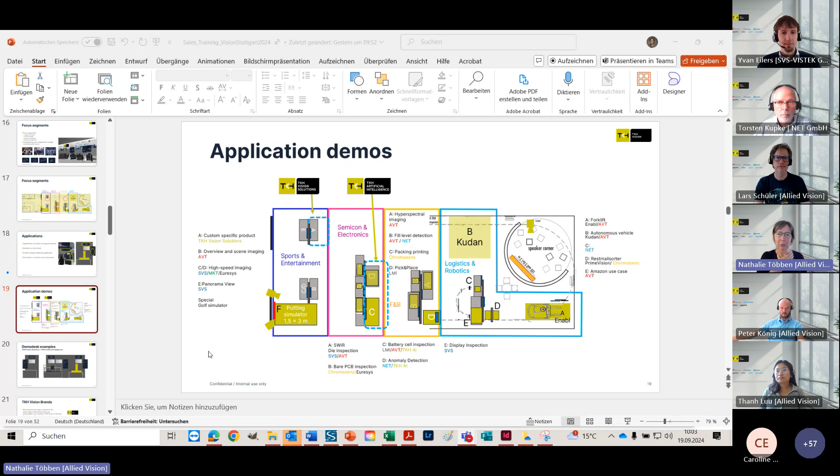So if you have the time to stay in the call, it would be very good that you also learn about this important topic. But we will record the presentation anyway, so we can also share the information with you after the call. And with this, I hand over to you, Lars.

Thank you very much, Nathalie. Yeah, so since yesterday, all of you are aware that we will have a different setup on the booth, mainly driven by the segment view. So the 4 segments we already talked about.

And this is reflecting our strategy. So at least at Allied Vision, we follow this kind of focus segment approach for roughly 3 years. And it's really the leverage to focus us to a certain demand, certain requirements in certain industries, segments, focus segments.

What I want to pinpoint to is, of course, we are not neglecting the huge market of factory automation. So this is still the story for us as a business, and not for the Vision Show at all. But we use the demos we show on the booth really to have eye catchers, to have talking points with customers coming to the booth.

So please, all of you who is participating in the show on the booth, please make yourself familiar with the demos so that you can, as we say, fill the first 5 minutes, and get the booth visitor involved into his problems, his questions, and of course, in the end, we want leads and deals.

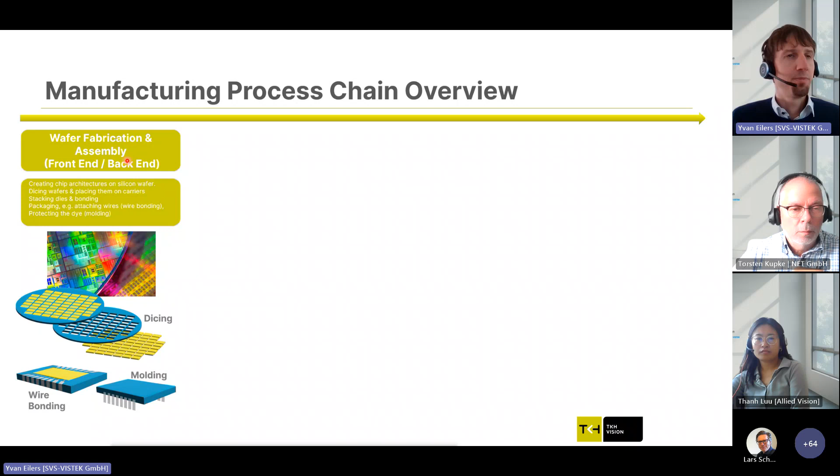The general idea of this segment area is to give a manufacturing process chain overview and to show that we have great product fit for inspection tasks throughout this manufacturing process. If you want to create an electrical product like a smartphone, a laptop, or even an electric vehicle, you need multiple different parts, and very often you also need a lot of electronics. In this electronics field, you start with the wafer fabrication and assembly step, classified into front end and back end application, including steps like wafer production and dicing of the wafer to get dies, wire bonding them, molding them, and in the end getting packaged ICs.

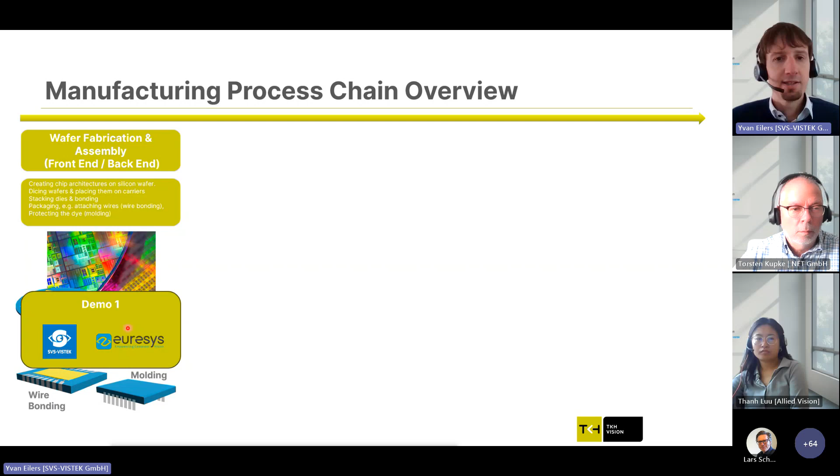This is where our very first demo is going to be situated. This is going to be a demo done by SVS-Vistek, which also uses Euresys products, and it's going to be a die inspection using SWIR cameras demo.

Once you have your packaged ICs, typically you go to the next step of PCB board creation, where you start with bare PCB boards on which the packaged ICs need to be placed and soldered. Here our second demo takes place, which is going to be a Chromasens demo, the bare PCB board inspection demo.

Nowadays it's also quite important to have batteries, for example for one of the very big growth markets in our industry today, electric vehicles. This plays a crucial part, but also in other components. Here our third demo is going to take place, demo 3 from LMI, which also uses Allied Vision products. This is going to be a prismatic battery cell inspection demo.

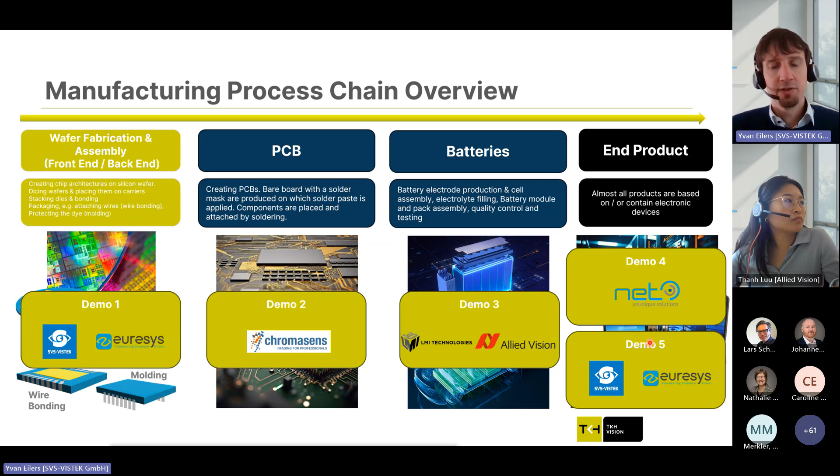Finally you reach end products, which could be a lot of different things, from PCs to laptops, displays, cars. Here we are going to see 2 demos. On the one hand, a demo from NET, which is going to be anomaly detection in USB sticks as one of the final products. The last demo, demo 5, is a high resolution display inspection demo done by SVS-Vistek, also using Euresys products.

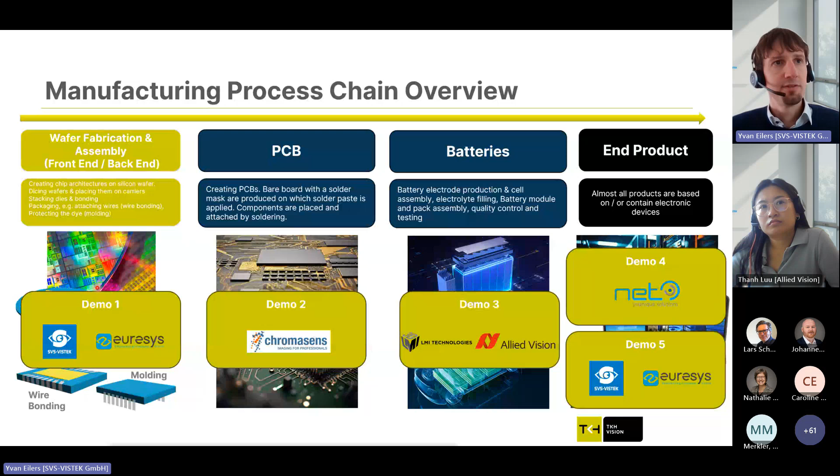So this is basically the manufacturing chain process overview with a logic following through the demos. Now I would like to jump into each of these respective demos to give you more details about them.

The first demo, as mentioned, is the die inspection using SWIR cameras. Whenever you have dies and you want to use them in your electric components, you have to make sure they are okay and don't have faults, meaning no faults on the surface, but also no faults inside the dies themselves. Typically these dies are created out of silicon as material, and here our SWIR cameras come in very handy, because silicon is transparent for SWIR wavelengths.

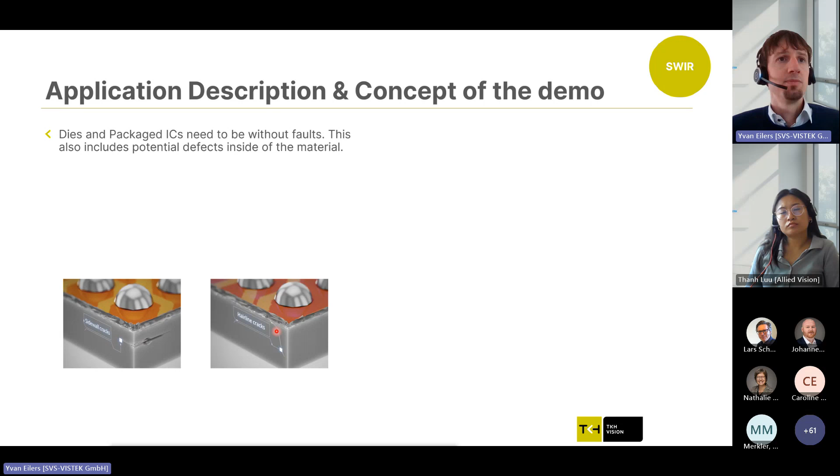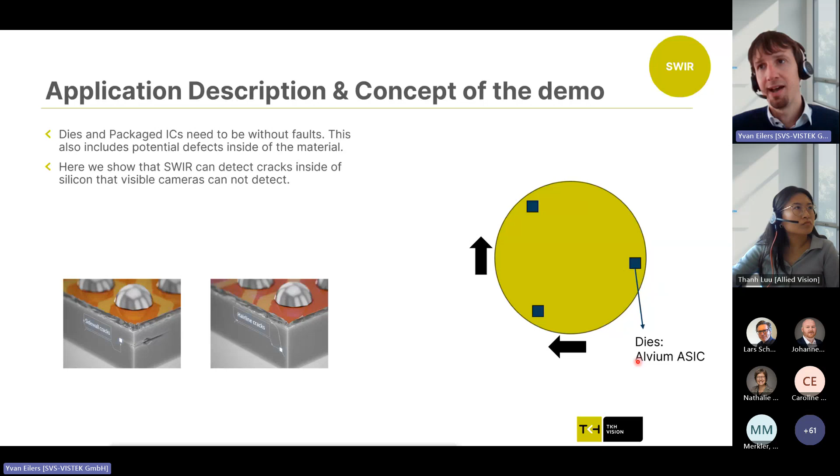Typical applications that you see in the industry are, for example, inspections for sidewall cracks or hairline cracks. We built a demo that, while not exactly the same, uses that idea, with a turntable where the dies we use are actually products we use ourselves - dies that are Alvium ASIC chips. We basically took them out of Alvium cameras, and we are going to inspect them with a new 5 megapixel SWIR camera, the FX0992 MCX-T.

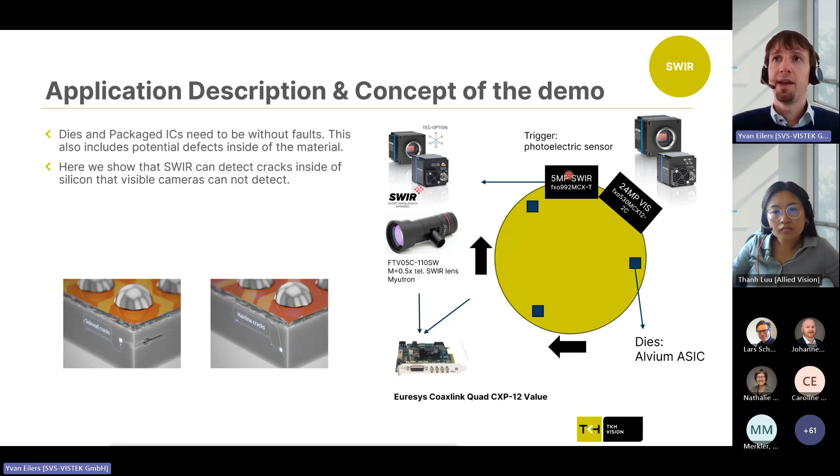This is a CXP12, a 5 megapixel SWIR camera which is TEC cooled, so TEC stabilized. We're going to attach a telecentric lens to it and read it out with a Euresys Coaxlink Quad CXP12 value grabber. Additionally, we have a 24 megapixel fxo530MCX12-2C camera, a 2x CXP12 interface camera that allows high frame rate, high bandwidth, high speed with 24 megapixels. On a monitor we'll compare the images of the 2 cameras so you can see on the SWIR image the cracks inside the dies, which you cannot see in the visible image because SWIR can look through the die.

Additionally, we're going to use Euresys Open eVision, a software suite, to classify these dies into okay or not okay, meaning broken or not broken. This one would be an example of broken, and this one would be an example of an okay die. We'll make it such that even though these 2 cameras are displaced in space, on the monitor the 2 images always appear at the same time. This is something the software team at Euresys is working on.

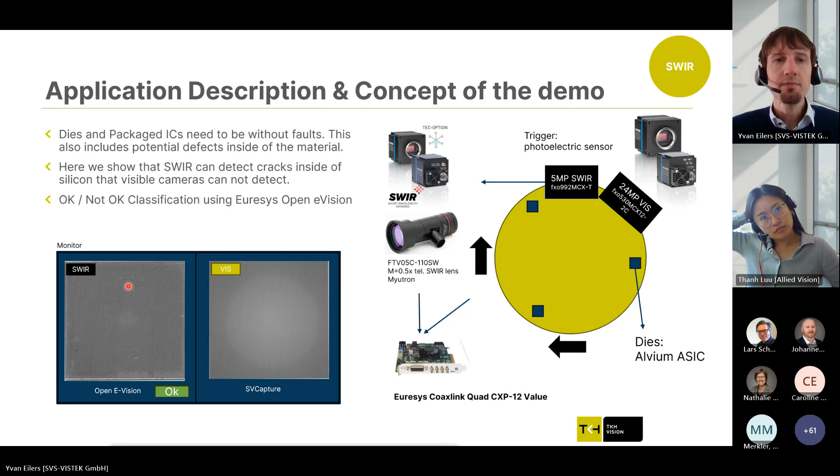What are the system highlights and benefits? I guess one of the biggest benefits for the customer is that he can reliably detect small subsurface defects inside of the silicon, and that is because of our new high-resolution camera. This 5 megapixel is a leap in resolution in the industry, something very positive because of the new Sony sensor that came out.

We also provide high image quality given our optimizations in the camera itself, such as 2-point NUC and defect pixel correction. Our TEC stabilization additionally makes sure we have very reproducible imaging results, and if you use this TEC to cool down the sensor, you get even reduced noise as a benefit. As Jens mentioned yesterday, we have a very broad area scan portfolio with different interfaces, resolutions, and camera sizes, so the probability is very high that we find a perfect fit to solve the customer's problem if he needs SWIR.

Additionally, we use the Coaxlink Quad CXP12 value grabber. That is a performance-optimized frame grabber that allows high frame rates, high stability, and low latency data transfer, which is basically all very important in this die inspection world, where customers typically need 30,000 to 40,000 inspections per hour. So a system that can go fast, that is stable, and that has low latency is of added value.

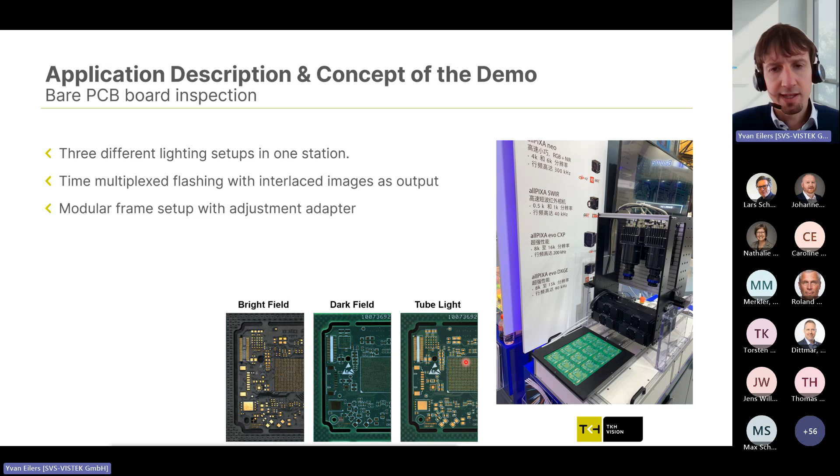The modular frame setup comes with adjustment adapters so that you can easily adapt it to your customer's application needs. This allows fast and optimized module creation. And as Robin mentioned yesterday, aligning the line scan cameras is far from trivial, so this adapter adds value and saves time for the customer.

So this system can be used for different inspection tasks in the bare PCB creation process. It can be used to inspect the screen printing, and actually also the photolithography, where one defines the circuit patterns and where electrical components should be placed. It can be used to inspect the subsequent chemical treatment etching, where these underlying copper structures are exposed, and to also inspect the mechanical processing, meaning, for example, the cutouts of the boards, if they are all at the right position. And it can also be used for classical AOI, automated optical inspection, where one basically looks for defects like stains, scratches, protrusions, if the pinholes are at the correct position, if there are shorts between the circuits, or even if there are open circuits on the board itself.

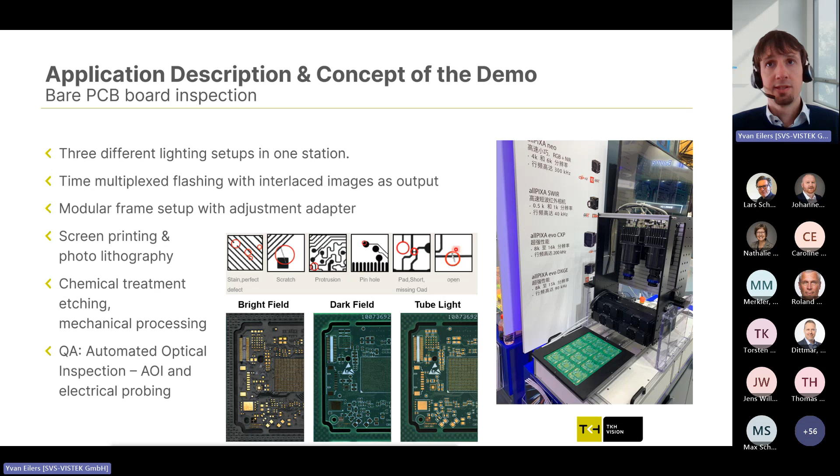System highlights and benefits are, on the one hand, the allPIXA camera itself. This is the allPIXA evo 16K with a CXP interface that allows 73 kilohertz in color output, but it can also be used in a mono version where it allows 200 kilohertz line rate. Additionally, the shifted mono lines allow high-resolution imaging. This is what we learned yesterday from Robin. He showed more detail in his presentation, so if you are interested in that, you can look at that again.

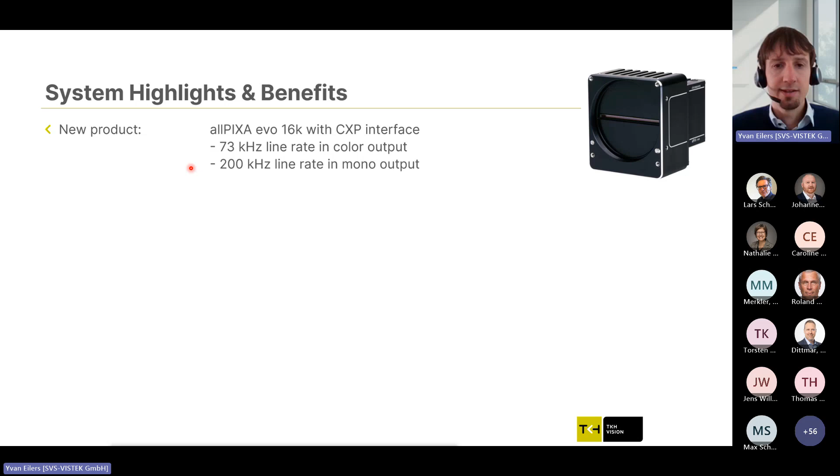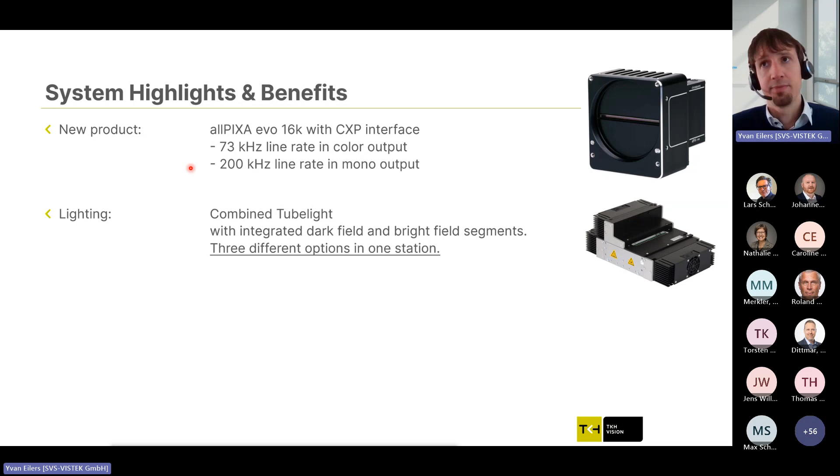The lighting is an essential and very cool part of the demo that allows 3 different lighting modalities in one compact module, with precise triggering functionality, so that this shown time multiplexing of the different illumination can be used, and they can also be used at high speed. So this is also a big USP here.

Then I already mentioned the Chromasens line scan vision platform that allows custom housing. As shown by Robin, it is a modular concept for an optimized and easy to integrate system, and it allows precise alignment of, especially, the difficult to align line scan cameras. At the end, such an inspection system has the benefit to improve the yield in costly electronic manufacturing steps and makes sometimes still present manual inspection tasks redundant.

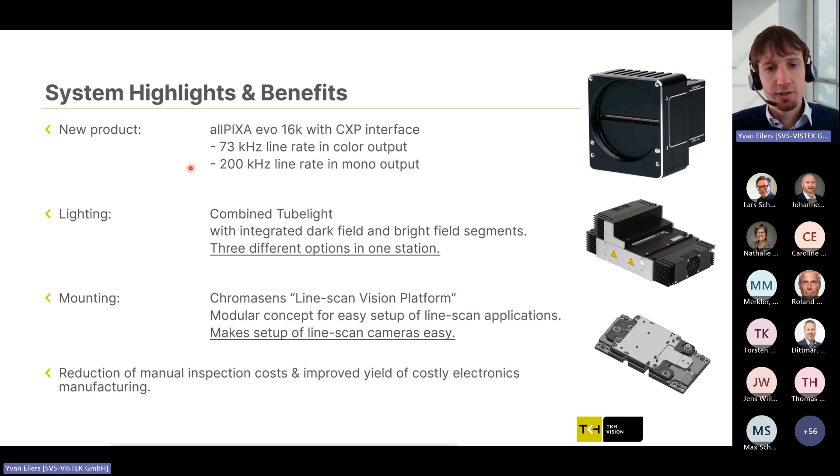So on the show, you can ask Martin Merkler, who is a product manager for Lighting, for deeper knowledge. Maximilian Klammer, who is the head of R&D, is going to be present, as well as Robin Zöckler, the project manager for cameras, who also made a presentation yesterday.

The next demo is going to be the prismatic battery cell inspection done by LMI, which also uses Allied Vision cameras and which uses the power of the TKH AI group. Christian Benderowitz already touched on this demo yesterday. This demo showcases a wide range of machine vision technologies, including 2D, but also 3D laser triangulation, and 3D confocal technologies for 100% inline quality control. In this case, it's going to be used for a prismatic battery cell inspection.

It uses different Gocator sensors and the Allied Vision camera, and the employed LMI GoPxL software, which basically runs this whole system in the background, links the different TKH vision technologies - here the different Gocators, but also the Allied Vision cameras. And the software is going to apply rule-based, but also AI algorithms to perform 2D and 3D image analysis.

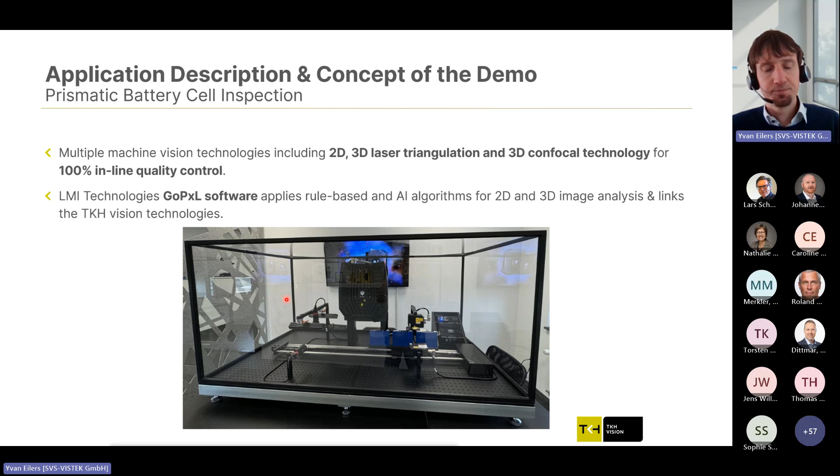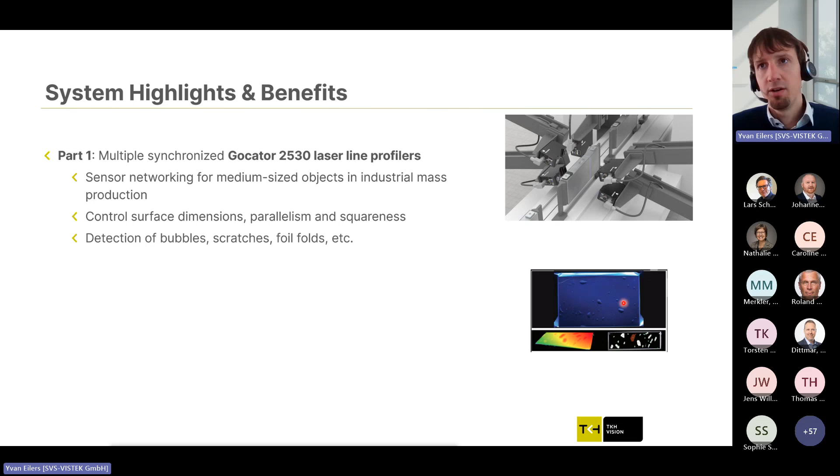So the demo is built up in 3 parts. The first part uses multiple synchronized Gocator 2530 laser line profilers. This is a powerful example of sensor networking for medium-sized objects, the prismatic battery cells, in an industrial mass production application. Here it is used to control the surface dimensions and the parallelism and the squareness of the battery pack, but it can also detect bubbles inside of the pouch or scratches on the foil.

The second part uses the Gocator 5516 line confocal imaging sensor to detect scratches and sub-micron defects on this shiny top part of the battery. This is ideal for metrology applications where the customer requires very high resolution and high speed. This system allows resolutions up to 2.5 micrometers in X, which I think is pretty cool, and the repeatability of up to 50 nanometers, which I think is also quite amazing.

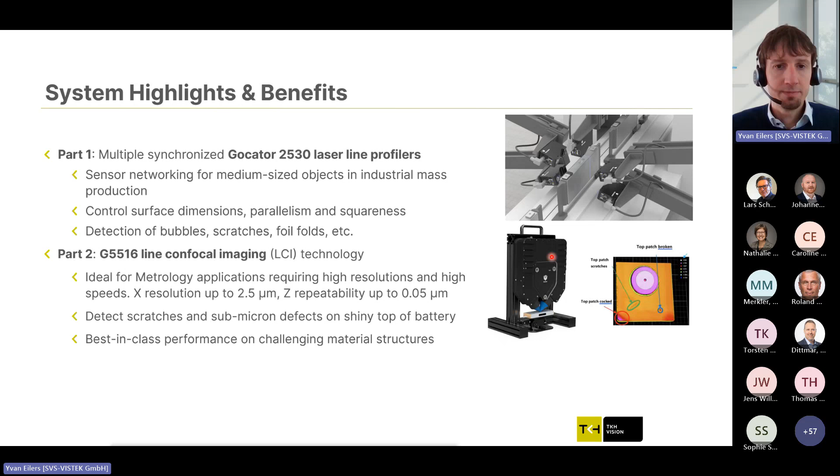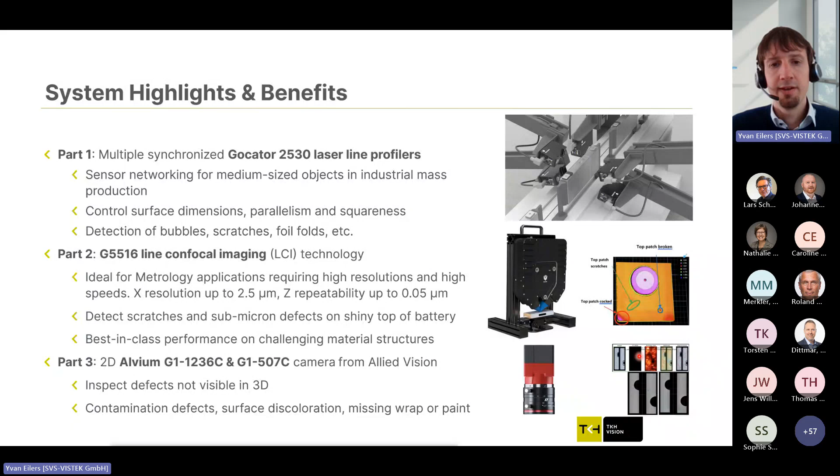So this system shows best-in-class performance on challenging material structures, such as multi-layered, curved edge, transparent and shiny materials, which Christian Benderowitz showed yesterday in his presentation, if you want to look at that again. Finally, the third part uses 2 cameras from AVT, the Alvium G1-1236C, as well as the G1-507C, to inspect defects that cannot be seen with the 3D sensors. These include contamination defects or surface discoloration, and also missing wrap or paint.

And as I mentioned, another important part is the GoPxL software, which is a new important product of LMI in this trade show.

This GoPxL software is to link all TKH vision products, meaning it can be used at the same time with Allied Vision cameras, ChromaSense cameras, or LMI technology, but it is also to include the other OpCos in the future.

With that, you can use the advantages of 3D, but also 2D imaging, in one application with one single software, which is a big USP for the customer.

And this GoPxL software comes with onboard tools like rule-based algorithms, but it also comes with AI optimized by TKH AI.

The GoPxL software also comes with the GoHMI Designer, a new application for easily building a custom user interface that shares the hardware acquiring data, for example the scan data, and outputs it to the end user of the customer, visualizing the scan data.

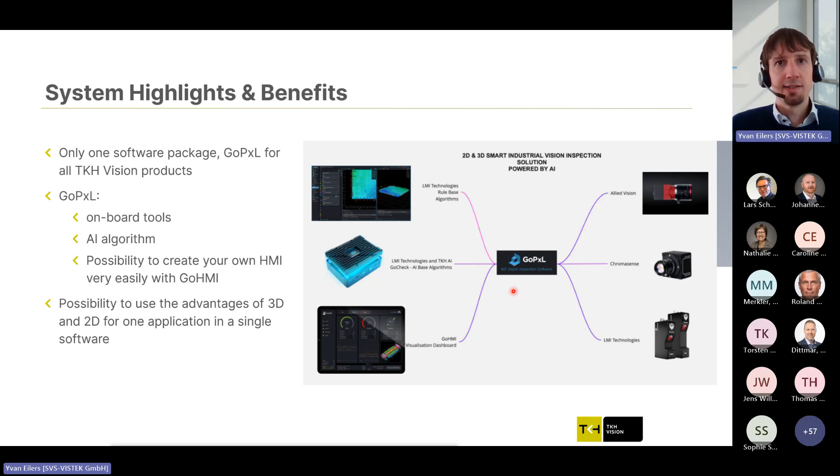The next demo, demo 4, is going to be anomaly detection in USB sticks, a demo created by NET, which also leverages the power of TKH AI.

As in many industries, also in the electronics industry in general, very often, normally always, various components are assembled to form a final product. For example, PCBs are assembled with connectors and a housing to form a USB stick.

During the steps in the production process, problems can arise, such as incorrect or missing components, which are sometimes only discovered later, and in a worst case, only in the final inspection. This would be quite bad, because then you have to throw away the whole complete final product instead of only partial components. The problem is that not all possible errors can be defined in advance.

And they cannot always be seen with a rule-based system. Especially in the case of previously unknown defects, large quantities of unusable end products can potentially be created.

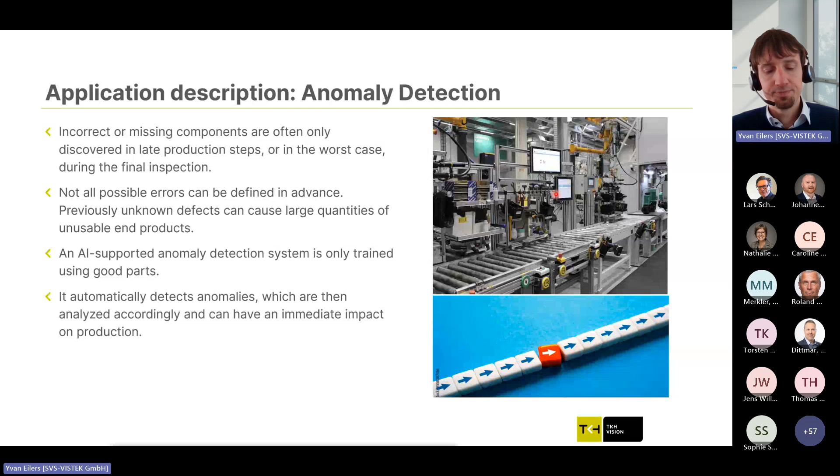Here, NET is going to show an application where the NetIM camera is trained with reference images as shown here. Then all kinds of different PCB boards with connectors are going to be placed on a toy train that is going to run in a circle.

The NetIM camera is going to look at these samples, automatically inspect them, and show the results on a screen. Here you are going to automatically see the detected anomalies. For example, here there's going to be a chip, a Halo IC, that is missing, and here there is actually a whole connector that is not attached, that is missing.

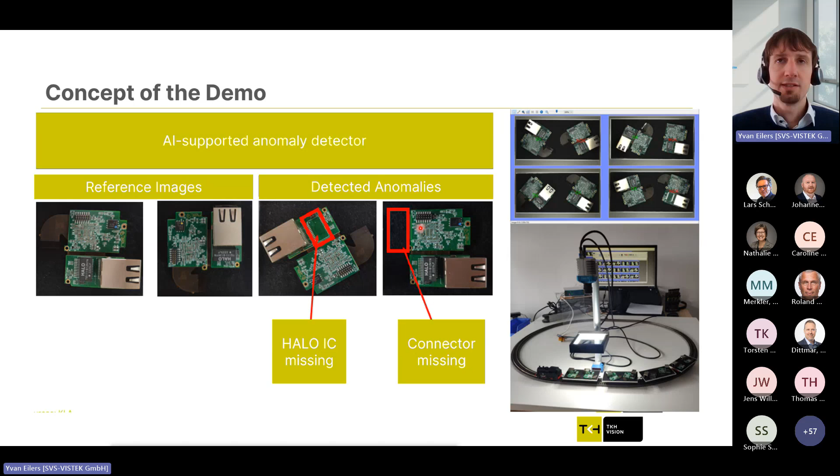The camera used is the IR2305C model, which uses a 3-megapixel IMX252 sensor and allows 65 frames per second. But the IM camera, as we learned yesterday, can in general be equipped with different sensors and adapted to the customer need quite flexibly.

Communication with the end user is through a 1G interface, and the AI model image processing is done efficiently in the camera itself, which is a big USP here.

The application software also includes training applications and training data management tools to make it quite easy and comfortable for the customer. A system highlight is that the AI-based anomaly detection is flexible and can be specifically adapted to different requirements of, generally speaking, industrial automation and/or quality assurance applications.

And the employed deep learning algorithms in particular are able to detect very subtle differences and anomalies in image data that are typically difficult to detect even for humans, but certainly also for traditionally rule-based systems.

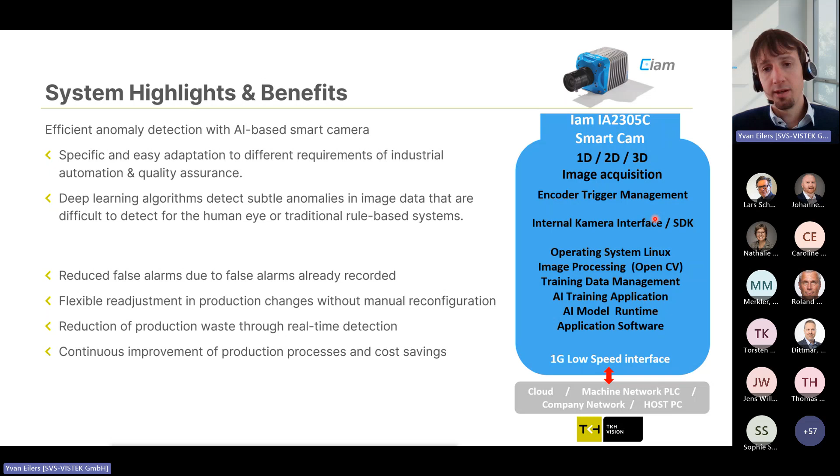Further benefits are that it is a self-optimizing system, meaning false alarms already recorded don't lead to false alarms again. It can be flexibly readjusted if there are changes in production without time-consuming manual error definitions, as often needed for rule-based systems. In the end, it allows reducing production waste through real-time decisions and continuously improves the production process through its functionalities and self-learning abilities.

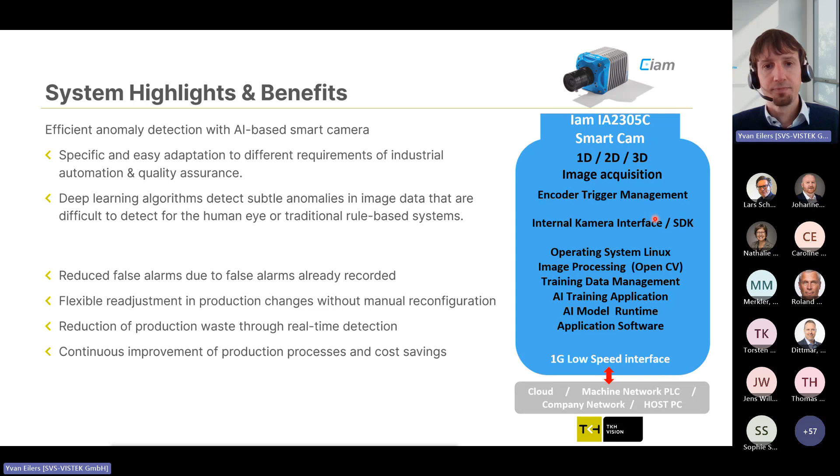So experts at the show are Tim Miller from the product management team, Arno Dieb from the FAE team, Jens Will from the business development team, as well as Thomas Höfner from the sales team.

All right, so then we already reached the last demo, which is going to be demo 5, the high resolution display inspection demo, which is done by SVS-Vistek in combination with Euresys.

As we know, increasing display resolutions is a major trend in our industry, and there are also rising requirements on display quality, also in terms of subpixel quality. Imagine AR, VR sets that you put very close to your eyes - there you really have to make sure all pixels are perfect, because you would see that directly with your eyes.

This calls for precise spatial measurements of luminance and chromaticity, and also highly accurate color measurements. This in turn calls for cameras with maximized resolution, high dynamic range, low image noise, and industrial camera volume manufacturing compatibility. This is exactly what we show in this demo.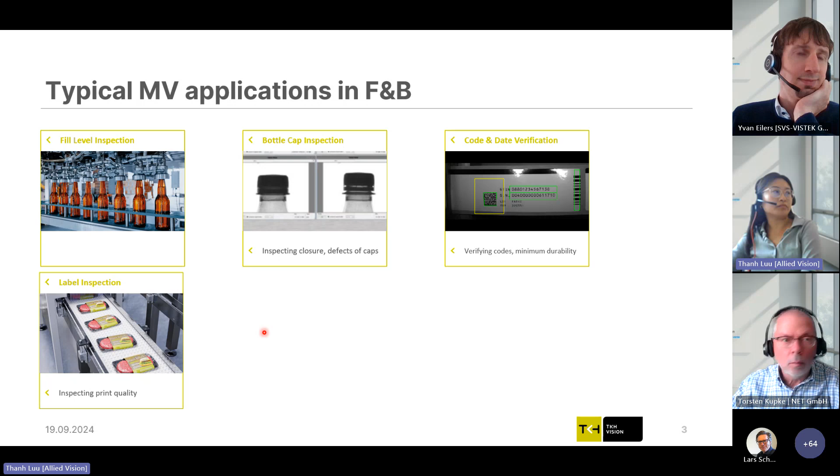Then we have code and date verification when it comes to the minimum durability, for example. And also very classic, I'd say, label inspection, so really looking at the print quality, if everything is all right with that.

Let's jump into the first demo, where we partner up with Clyde HSI. Clyde HSI is a partner from us, located in the UK, and they are specialists in optical spectroscopy, providing a wide range of both hyperspectral and conventional spectroscopy.

Instruments and full systems as well. For this demo, you will see the hyperspectral scanning system, which will be provided by Clyde, and the setup will be supported by Clyde, hopefully.

The system is available with up to 2 cameras, which you can see here on the left and on the right. However, at the Vision Show, it will be only 1 camera, and this camera will be our Goldeye, the AVT Goldeye.

What else can you see? You can see illumination is included, and we have a conveyor belt as well.

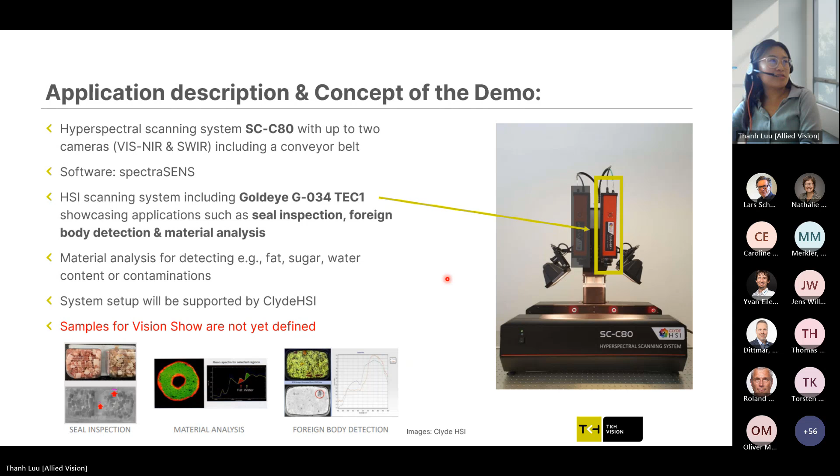Let's come to the system highlights. Well, first of all, the system is very quick and easy to set up. As you can see, it's not super big, so it's easy to set up on standard tables. It can acquire high resolution spectral images in seconds.

It has autofocus, also auto exposure setting. You saw illumination is integrated as well. The software is very intuitive, and it has the optional possibility to have a dual camera acquisition. However, in our case, it will be only 1 camera.

On the right side, you can see how it could look like when inspecting meat and distinguishing the bones from fat and lean meat.

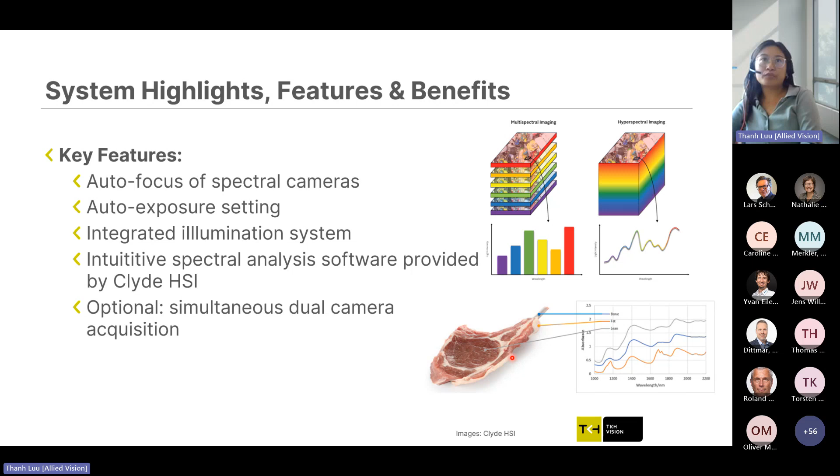Who can you ask for this demo? Well, we have our expert, of course, Jens Hasshagen, who is Business Development Manager for SWIR. Then we have Ralf Hesselberg and Arun, who will hopefully soon also be trained how to use the system.

We assume, not the whole Vision Show, but maybe one or two days, hours, there will also be John Danskin from Clyde, HSI itself. They will also have their own booth at the Vision Show, as far as I know. I'm not assuming that there will be one person from Clyde all the time with us, but I think that's no problem.

Let's move on to the second demo, which will be showcasing the application fill level detection and material definition of liquids. This demo is provided by NET, our OpCo, and the product is the Iam, which is the AI-based smart camera.

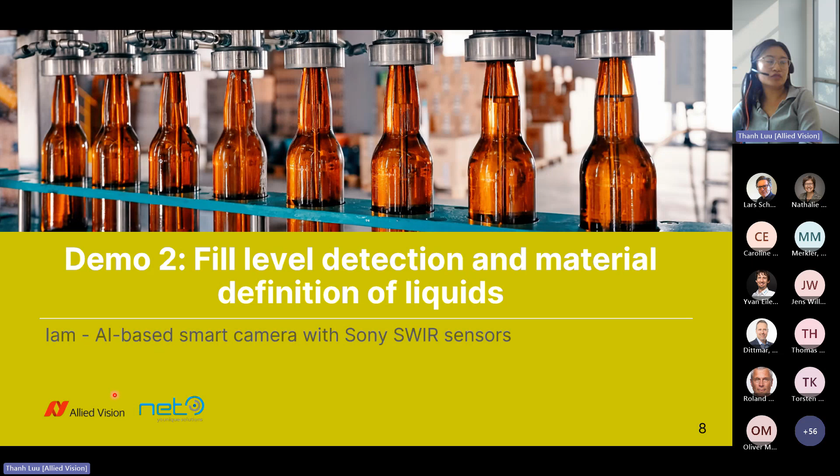Now you have heard it several times already, it has the Sony SWIR sensor. And why is Allied Vision here as well? Well, the camera is also based on the Alvium series from AVT, which is why both OpCos are shown here.

So how will the application work? You will see a turntable with bottles, and on the bottle there is a label which is opaque.

The application works with a wavelength of 1300 nanometers, achieved through mixed lighting and a bandpass filter, and corresponding optics. In this range, the label is opaque to visible light but becomes transparent so that the fill level can be determined precisely.

And then on the monitor, you will see it looking like this. One special aspect to mention is that these bottles will be filled with water and oil, and with this application, the contents can then be distinguished due to the different light transmittance at 1300 nanometers.

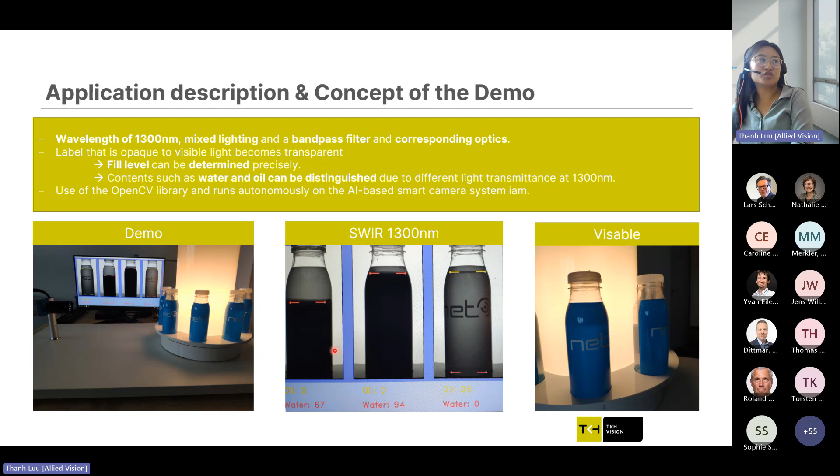That's basically about this application. Maybe one more thing to mention is that the self-developed OpenCV library is being used here, and it's going to run autonomously on the smart cam itself, as Yvan already mentioned for his application.

The system highlights, features, and benefits: we have the camera with Sony IMX sensors with a spectral range of 400 to 1700 nanometers. The Iam is a very cost-effective camera that includes visible and invisible spectrum, but also image processing algorithms.

And it has an open camera concept, so the customer is free in choosing the software.

Who are the experts for the demo at the booth? You have seen them already in the previous presentation from Yvan. We have Tim Miller, product manager, Arno Dietz, FAE, Jens Will from business development, and Matthias Eggenweiler from sales. So if you have any further questions, feel free to approach the NET colleagues here.

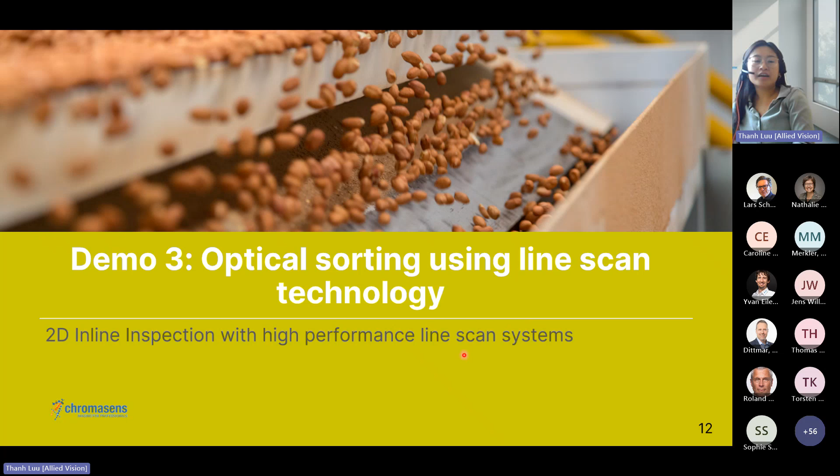For the third demo, we have the application optical sorting, but also print inspection, let's say, using line scan technology provided by Chromasens, of course.

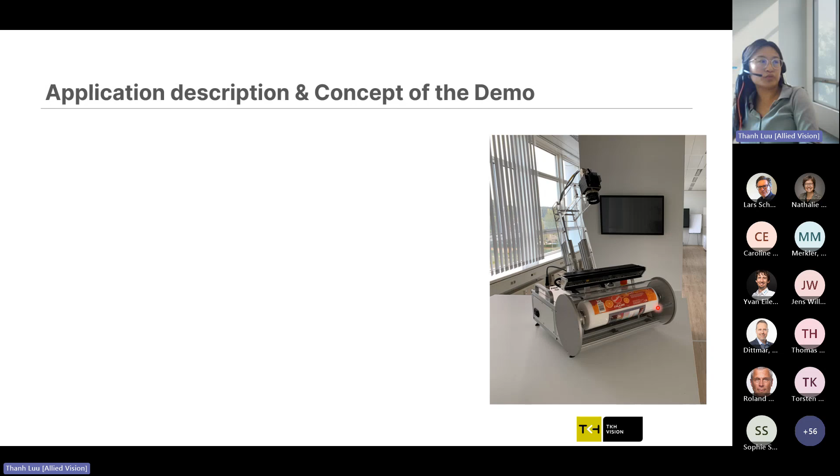What you will see is this roller here, where there's a foil on, or a packaging foil, let's say, from a bottle. And then we have the Corona light from Chromasens and the allPIXA neo 6K camera. On the roller, we don't only have this packaging foil, but also a second sample, which will be lentils, rice, or coffee beans that are glued on the roller.

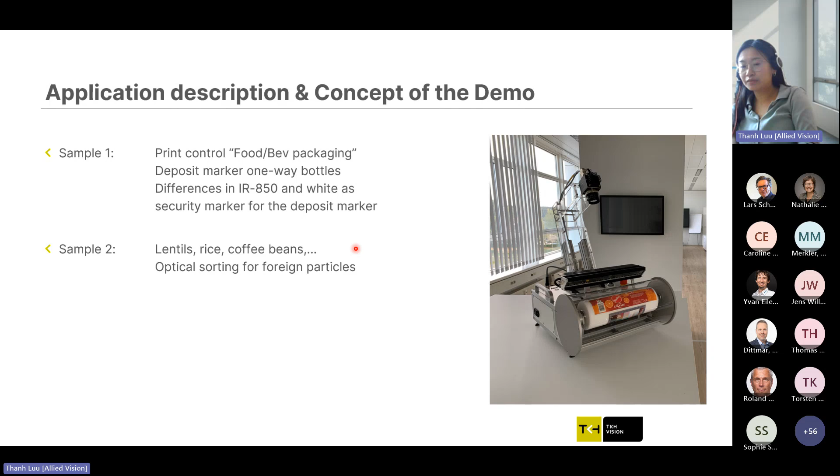What we want to show here is for sample number 1 that the camera is capable, has the special feature not only to provide RGB images, but also near-infrared images. You will see the deposit marker on the left side.

This is the RGB image. On the right side, you have the near-infrared image. At a wavelength of 850, you will see that the middle, or the bottle here, will somehow quite disappear, let's say.

This can be considered a security feature, so it proves the authenticity of the packaging. The fact that the color of the deposit marker behaves differently in the near-infrared spectrum compared to the visible one is the proof, let's say.

For sample 2, we will have these rice corns, lentils, and then there will be false lentils and rice corns, and this will also be detected by the line scan camera from Chromasens.

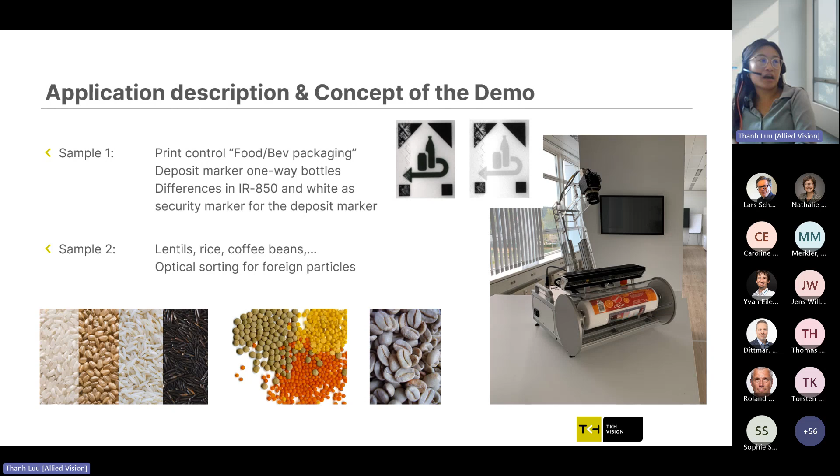Highlights, features and benefits. First of all, again, we have the allPIXA neo 6K with the near-infrared channel, with line rates up to 90 kilohertz color and 270 kilohertz in mono. And it's very compact, so with its small size, it enables simple and scalable integration in small installation spaces.

The camera is available in 10 gig E with a 10 gig E vision interface or CoaXPress. Second, we have the Corona illumination dark field module with white and infrared LEDs mixed.

What is so beneficial about it? Well, it has very high efficiency reflector technology, and it's one of the brightest line lights in the market.

It has a modular concept for different lighting setups, and it has over 560,000 setups that are possible.

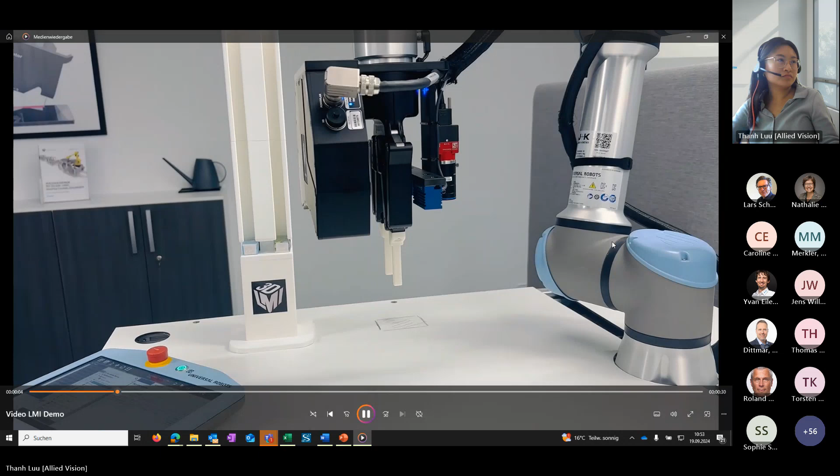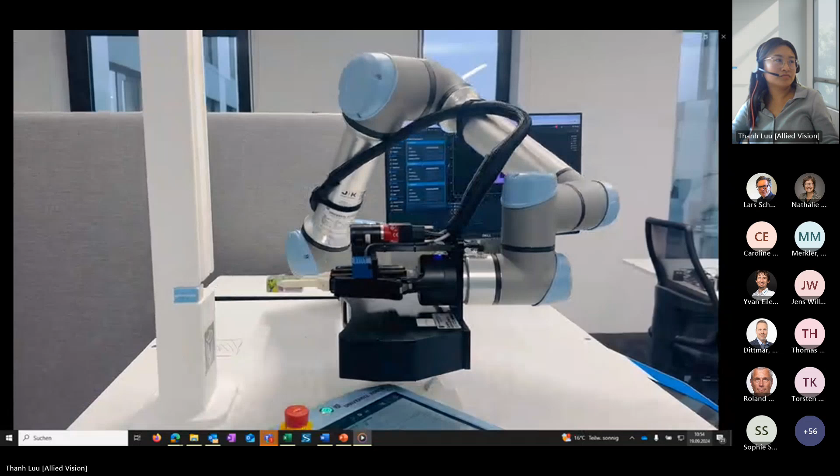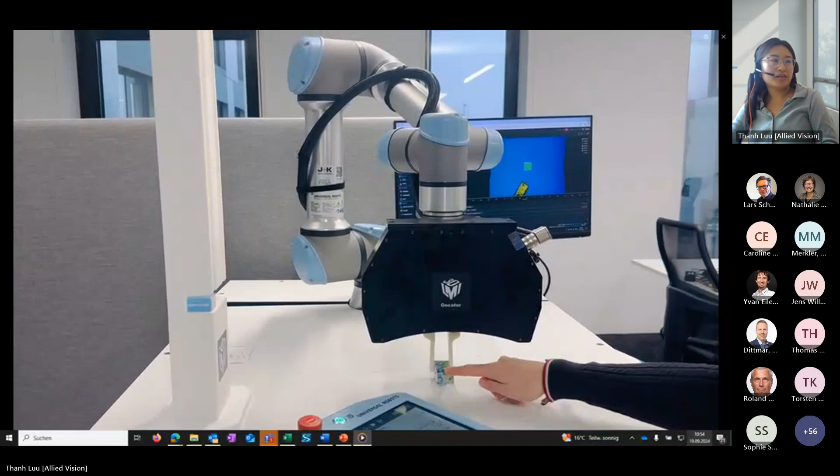So you'll see the robot will grab a package, which has M&Ms inside. The Alvium, I will just explain afterwards.

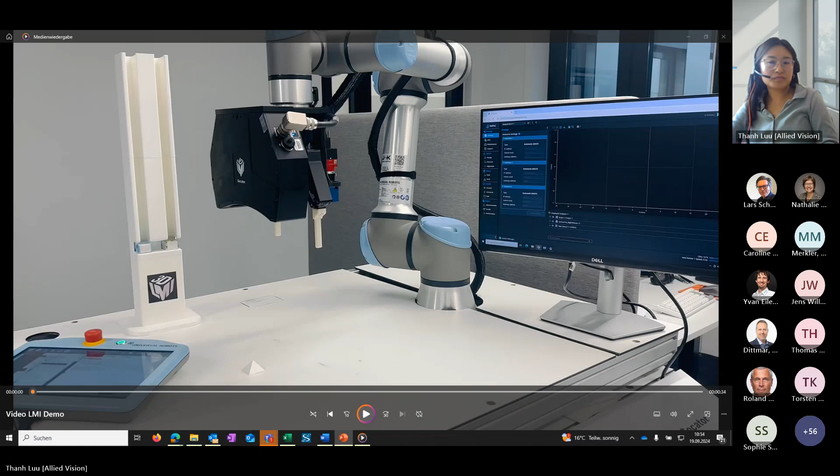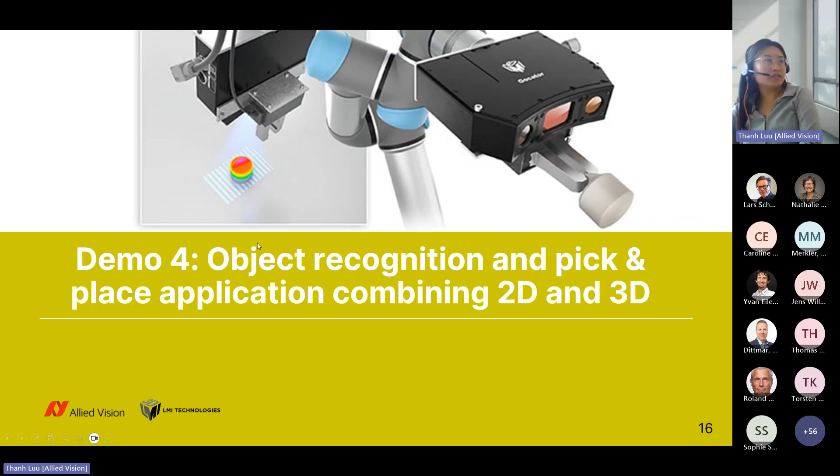After having seen this short video clip, I would like to tell you that this is actually somehow a game for visitors coming to the booth. The main objective is to showcase to the customer the possibilities of 2D and 3D from TKH Vision.

The game works this way: we have the M&M package, which you have seen, and on one side there is the TKH Vision logo printed, and on the other side there is the LMI logo printed. The visitor can then bet on which side the package will fall. The robot will grab the package and let it fall, as you have seen in the video.

The Gocator 3520 will take a 3D snapshot and find the exact position. The Alvium that is also installed there will recognize the logo on top. If the visitor guessed the right side, he or she wins and can take it with them. When nobody is playing, the demo will still run in a loop program. So this is a little interactive game for visitors, and I think it's quite interesting and fun to have some giveaways as well, even if it's small.

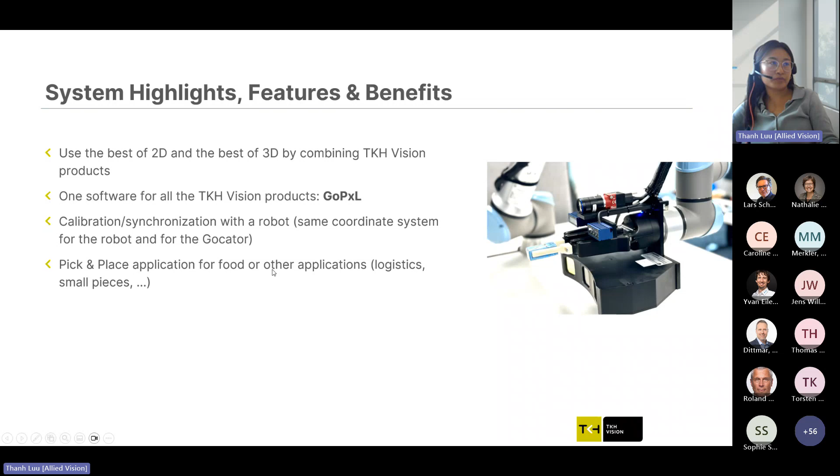Who's the expert team here? Same as for the other LMI demos: we have Marion, Lars Fermum, and Caroline Engels, who will be supporting at the booth and also in case of questions before the Vision Show. Feel free to contact our LMI colleagues here.

And that were the food and beverage demos. Thank you, Thanh. Then I will take over for the next segment, demo presentation.

Hopefully you can see my screen now. I get a quick... yes. Yes, we can. Perfect, okay, perfectly.

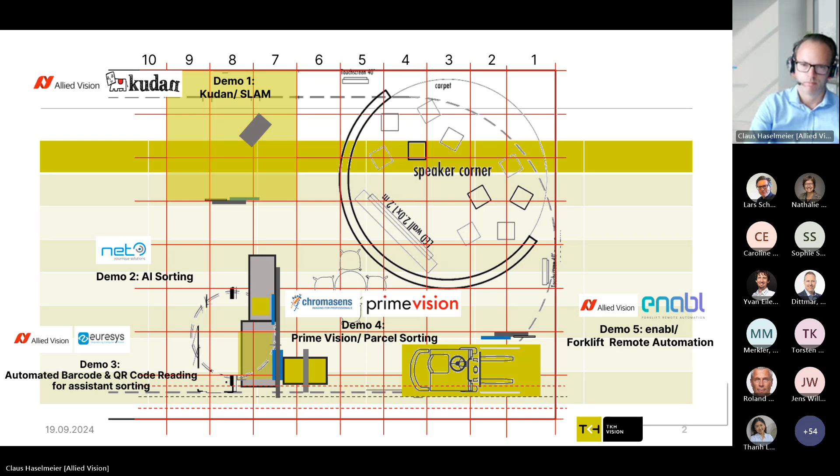Okay, let's start with the first demo.

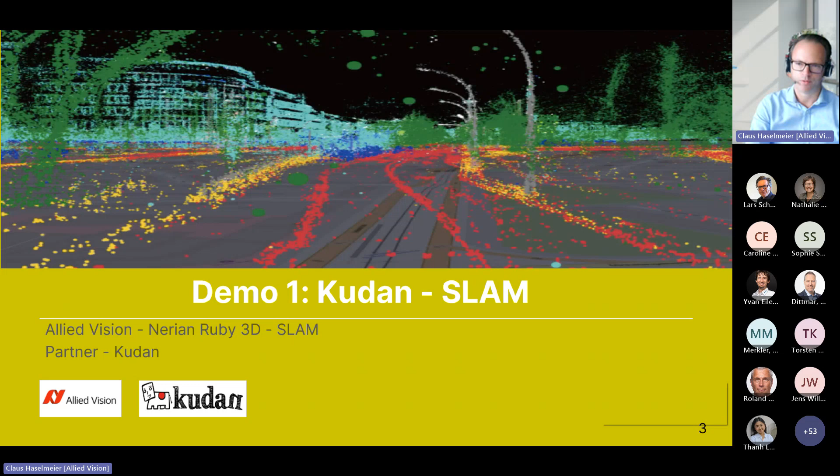It's a Kudan SLAM application from Allied Vision with Nerian Ruby 3D, partnering up here with Kudan, which is a Japanese company developing SLAM software.

In regards to the application description and the concept of the demo, here on the right-hand side, you see the Kudan mobile development kit, which includes 2 Ruby 3D cameras on each side of the vehicle. You can see this quite well on the right-hand side, and also on the other side, there's the Ruby 3D. This robot will be in a small demo arena, driving around 3 by 3 meters.

Representing the SLAM - if you don't know it, it stands for simultaneous localization and mapping. This technology is used for enabling robots to navigate in warehouse environments, but of course it could also be used outside in different applications. But here we definitely want to focus on warehouse environments.

It has an IMU included, which is also included in the Ruby from Nerian. The IMU is a motion sensor, so to understand the position and surroundings autonomously.

The SLAM technology itself is of course crucial for mobile robots, such as any kind of autonomous vehicles or drones, to enable them to operate in unknown and dynamic environments.

Apart from the demo, Allied Vision and also Kudan, we've collaborated already for like a year. So I linked you also here - you get to a landing page from us talking more about the Kudan and Allied Vision collaboration. And there's also another link which brings you to YouTube on our Allied Vision YouTube channel.

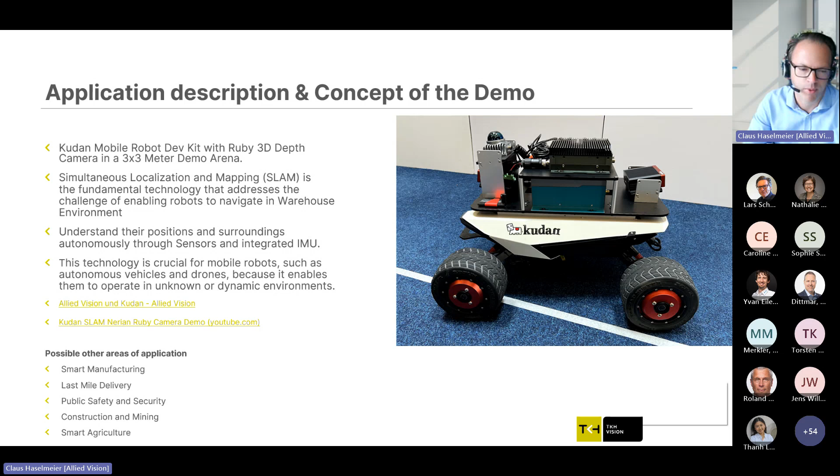There you can see the development kit showing the SLAM application in action. Other application areas for this development could also be smart manufacturing, last mile delivery, public safety, security, construction, and smart agriculture. Some system highlights and benefits you get with this development kit here.

The hardware and software is integrated in one package. This has a complete modular architecture. The SLAM technology uses advanced sensor fusion with the Nerian Ruby, and for the customer, it's in general possible to configure them for their needs.

So it can include, apart from 3D cameras, also 2D cameras, and also LiDAR systems. And it has an easy integration with already developed systems, including ROS compliant for mobile robots.

So therefore, the benefits would be here: fast integration evaluation for developing such a mobile robot. It has a very high accuracy. It's very robust for navigating in challenging environments. It has a flexible architecture for all the various use cases I just named before.

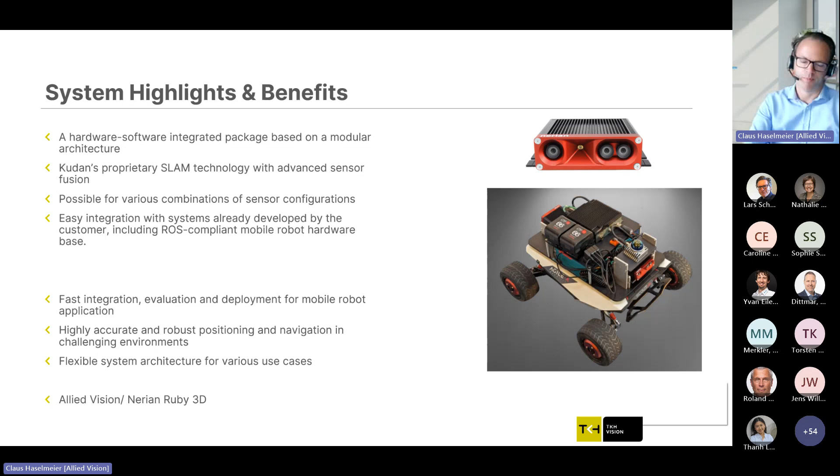And from the product side, as mentioned, we have the Allied Vision Nerian Ruby 3D included in this demo. The experts for this demo and the products would be Denise Müller and Konstantin from Nerian. They will be available on the show.

We will also have the guests from Kudan all 3 days at the show, Oliver and Tian, supporting and showing the demo to our customers and visitors.

Okay, let's jump to demo number 2. It's the AI sorting demonstration, including the iam smart camera for their AI-based sorter on a teachable edge device.

A similar application was also shown before. So you can see here already 2 build-ups. You can see here the iam camera on top of this plate, which is rotating. You have 3 buttons here, and on the right-hand side, you also see it in action, having a small car. Actually, the application example sorter here has the possibilities for digital inputs and for recording those kind of live images. In this case, it was a car.

On the show, we will have medical packages and cosmetic containers. So what you can do is place, let's say, the medical box underneath the camera, press the digital input here on the green button, and then take a different one, press the red button. Then if the plate rotates, it will present you and give you the corresponding LED bar, which you can see here. It's now lighting up in green, or if it's the other product, then it will be lighting up in red.

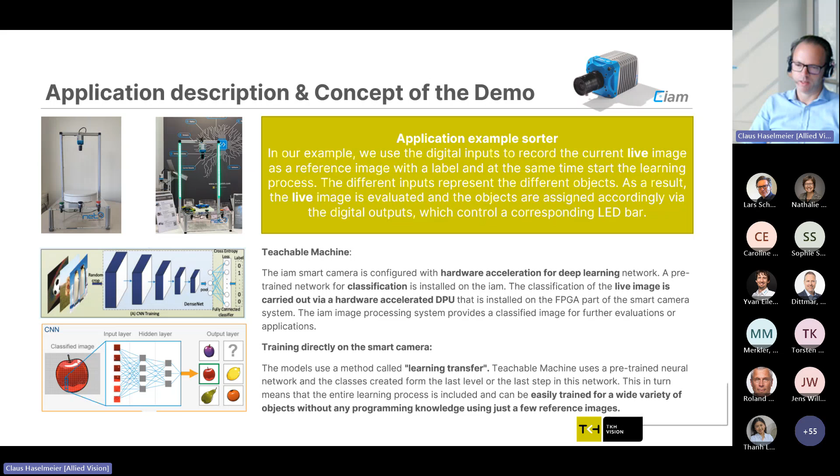For the object detection, it uses the classification, which is installed on the iam, for those kind of live images, which is accelerated by the DPU, the deep learning processing unit, on a Xilinx FPGA. The learning process and the learning transfer is very easily trained for a wide variety of objects without any programming knowledge, using just a few reference images and not a whole bunch.

This brings me directly to the system highlights and benefits. It's very simplified by processing these kind of reference images by this included DPU, which is installed on the iam camera, by classifying all these different kind of images, which is often used, for example, for incoming deliveries according to different items. So benefits here would definitely be the simple training method without any kind of prior knowledge, and onboarding training using just a few images and not a whole bunch.

The possible HMI-based digital inputs and outputs. The included API, the application programming interface, for very easy integration to classify all these different kind of images.

On the right-hand side, some highlights of the SmartCam you now heard several times before. For this application, we will use the iam with a 2D sensor inside, but you also could use it as a line scan or in a 3D setup. It's an ARM-based processing unit, including an FPGA, operating on Linux with a 1 gigabit interface. The experts for this product are Tim Miller, SPM Arno, Jens, and Thorsten Kupke from NET.

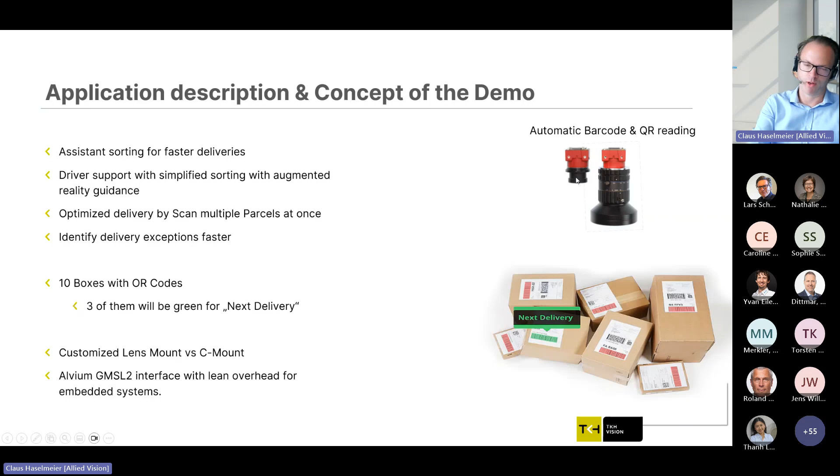On the demonstration, we have just connected this one, but this one will be installed next to it just to give the visitors the impression of the size of this very small lens. I'll come to that now.

So, system highlights and benefits. You have a quite high depth of field of 200 millimeters. We have a lens here which is specially designed - it's not a standardized lens, or let's say not a standardized mount, which is specially designed for rugged environments. It's a proprietary lens mount.

So it's very small, it gives you great quality. We tested this in-house, so it's the same quality as a C-mount lens, or even better. And also on the price level, you get really good quality for this kind of value. As you see here on the right, it has no thread for the lens - so what we use here is our lens alignment, it's a fully automated process.

It allows you to automatically focus on the given customer specification. You can also have custom MTFs to optimize different regions. Normally it's optimized for the center of the sensor, but it's also possible for the corners. With this process, you have 100% quality control.

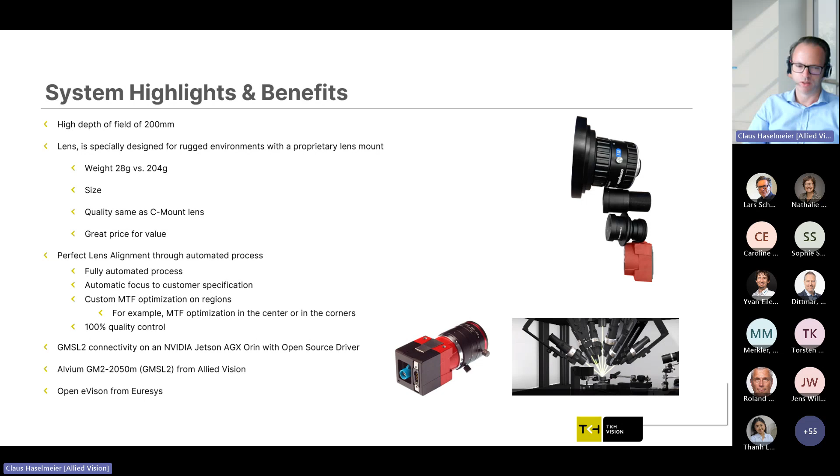We have this camera connected via GMSL2 on an NVIDIA Jetson AGX Orin, running on our open source driver available on GitHub. We use here Alvium, a 20 megapixel monochrome camera from Allied Vision,

including the Open eVision from Euresys. The experts for this demonstration and the products you just saw would be John from Director PM, Arun and Ralph from Application and Engineering, and myself.

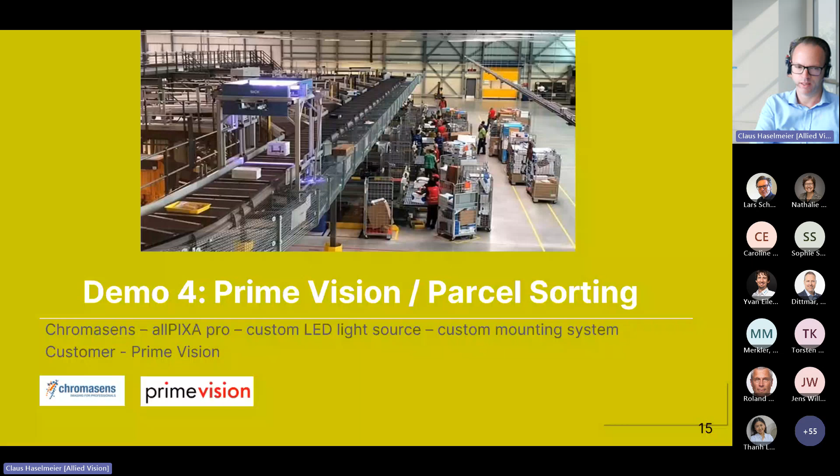Demo number 4 from Chromasens. They will demonstrate a custom development for Prime Vision for parcel sorting. This includes the allPIXA line scan camera with a custom LED light source and a custom mounting system they have developed. The application and the concept of the demo.

Normally, parcels are standardized - let's say if you order from Amazon. Just one thing I have to say in advance: the photo you saw on the last slide, this system from SICK, we replaced.

Yeah. Okay, could continue. Okay. Thank you, Martin. Yeah, you can just add after this.

Normally it's standardized, especially here in Europe when you order something from Amazon. The labels are standardized, also the mail pieces - it's registered somewhere, so the parcel company, DHL or UPS, knows what to expect. But if you order something from China, for instance, it's not standardized at all. It's reflecting, it's wrapped by plastic, and the quality is often poor. Here the customer had the problem to improve this setup.

So Chromasens developed this reject mail sorter, which you now see here on this photograph, also placed on the Vision Show. On the right-hand side is a customized system including 2 allPIXA cameras with custom lens mounts. Each camera has two lenses, so in total you get 4 images out of the system, and it has 2 customized lighting setups. It's ready to use and integrate without any extra calibration. It removes reflections, for instance on the plastic or foil, with a polarizer setup in the lighting and camera, using this co-planar lighting setup you see on the right-hand side.

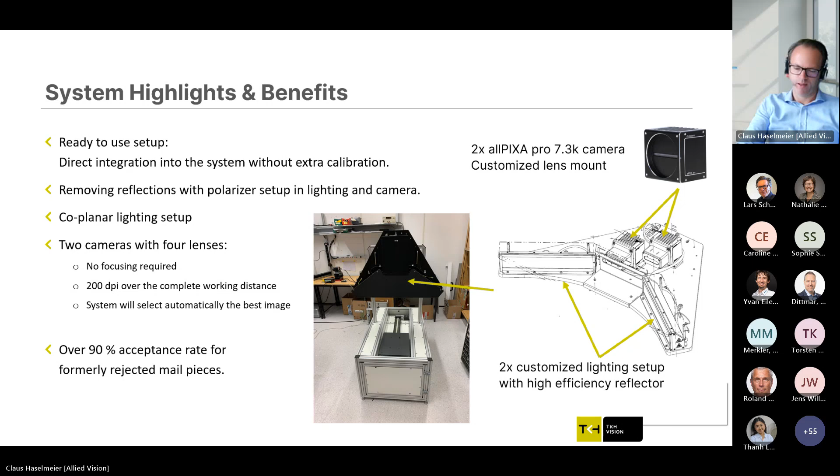As you could hear, Martin is one of the experts for this demo, along with Max, both from Chromasens. If you have any questions prior to the Vision Show or at the Vision Show, please go to Martin and Max, and they will support you.

Okay, last but not least, demo number 5. It's a forklift remote automation demonstration, including products from Allied Vision, the Alvium FPD-Link III camera, together with our customer Enable.

The application description and the concept of the demo. Enable is a startup company in the south of Germany, focusing on the logistics industry. What they have done is enable forklifts to be remotely automated to overcome the labor shortage in this market.

With this technology, it's possible to control this forklift remotely via the internet from different countries. It really doesn't matter where the driver of this forklift sits - it can be that the driver is in Germany and the forklift is remotely driven in Spain, just as an example.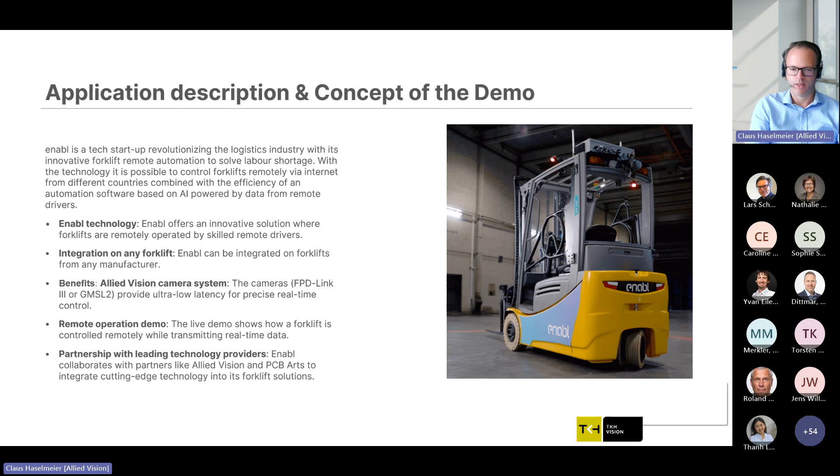Some system highlights and benefits here. Enabl combines the efficiency of automation with the flexibility of human control.

You can see here on the right-hand side, this is one of those drivers who controls the forklift remotely. It offers a ready-to-use solution, so it's easy and seamlessly integrates into existing logistic processes. It's scalable, so as the business grows, they can request additional forklifts and drivers from Enabl to meet rising demands. It's a pay-per-use model, which allows you to be very flexible, scalable, and cost-effective. Over time, Enabl also supports companies to move forward towards complete automation of their fleet.

We have integrated 4 Allied Vision FPD Link cameras with S-mount. Also, we have Nick Schmidt from Enabl joining us during the show, and he has a pitch in our speakers corner on Tuesday, the 8th of October at 3:30.

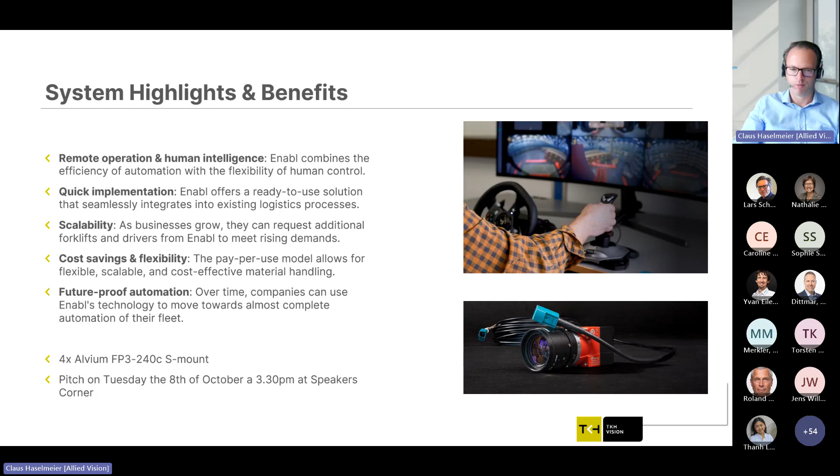Here on the right-hand side, you see Nick. He will join us at the Vision Show. The experts, apart from this demonstration about the customer, are Christoph Hornlen from Allied Vision, Ralf from Application Engineering, and myself. Thank you for your attention, and see you all at the show.

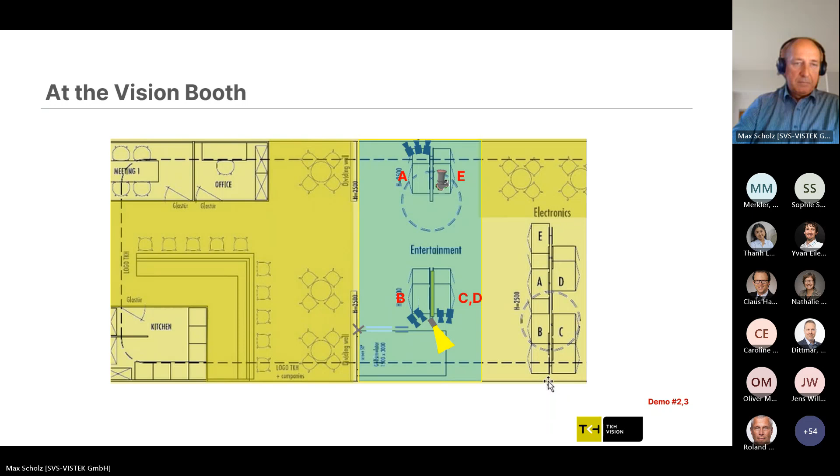Demo A concentrates on panorama view, overview, and 360-degree view, which is often used for entertainment and also in sports. In this demo, we present the new SVS-Vistek camera series FXO 25 GigE with attractive resolution of 12.3 to 24.6 megapixel. In the live demo, the cameras are mounted in a half circle to indicate multi-camera applications, which are often used to get panorama views in stadiums, event halls, or for entertainment and sports in general. With the fast GigE interface, the cameras support the attractive standard of 4K 60, which is very popular in broadcast and entertainment applications.

Also, the machine vision portfolio generally only partially meets the requirements for broadcast and entertainment applications. These new cameras are also a first step to get closer. High resolution and a fast standard GigE interface enable them to be used for single and multi-camera systems in this range. Additionally, they could be used for industrial applications which need higher performance with a standard interface, such as process monitoring, quality assurance, and inspection.

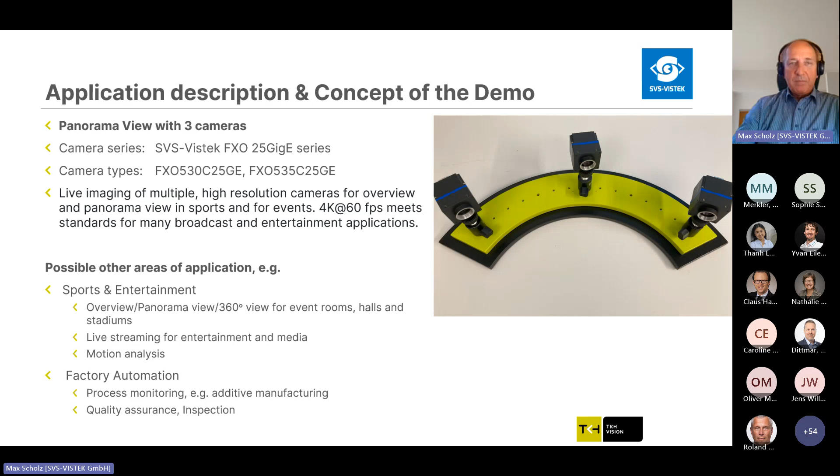In the demo, we selected a 12.3 megapixel camera with up to 182.5 frames per second, and also a 24.6 megapixel camera with 92 frames per second. But the complete FXO 25 GigE series reaches from 1.8 to 24.6 megapixel, which allows choosing tailored cameras for applications. All cameras have 12-bit sensors with a dynamic range of up to 72 dB, or related to broadcast, approximately 12 steps or stops. The integrated flexible SFP28 interface allows plugging in standard SFP28 transceiver modules for copper or fiber-based cabling up to cable lengths of 10 kilometers, which is sometimes mandatory for large event halls.

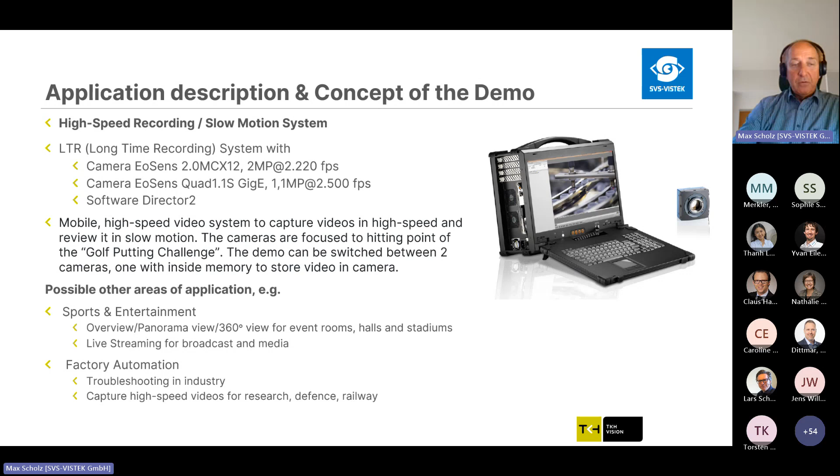The very compact and easy to use system delivers highest performance. There are also other cameras already adapted. With up to 8 terabytes of non-volatile memory, the system can store videos from seconds to hours, depending on connected cameras and settings.

The Director 2 software enables the customer to control cameras and the system in a very intuitive way. The LTR is one of the few systems which covers a complete solution within SVS Vistek.

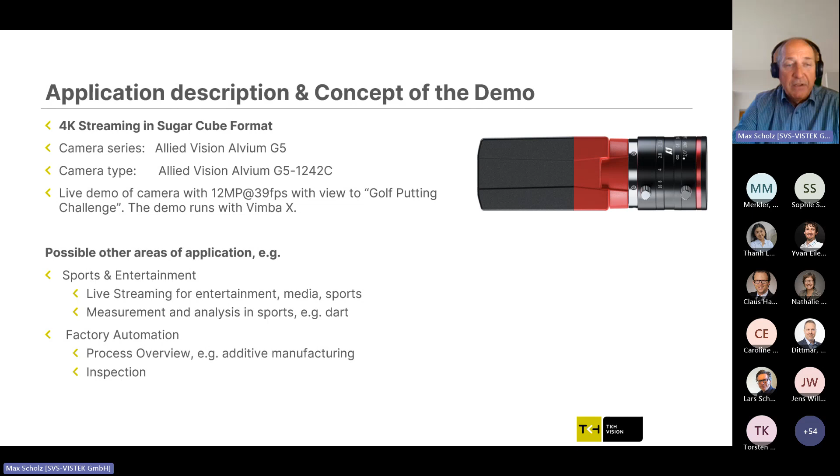The very compact design with sugar cube format, extended dynamic range of approximately 12 stops, meaning 72 dB, a large function and feature set, and the standard and performance interface of 5 GigE enables the camera to be used for different applications in single or multi-camera systems.

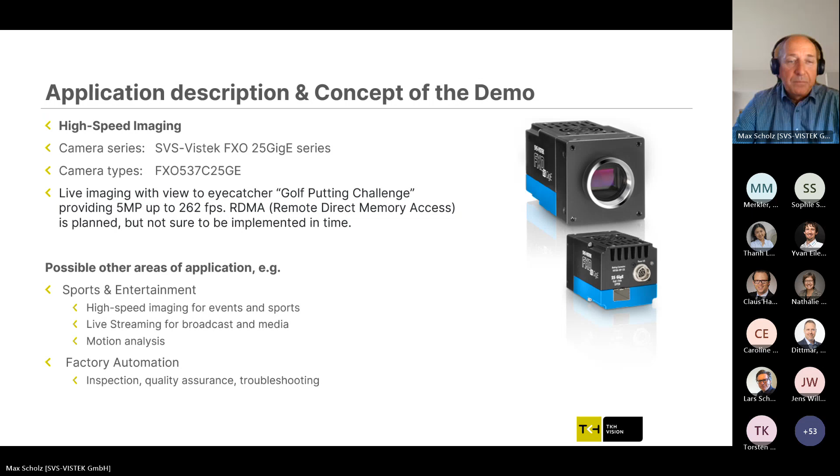In addition to the already announced features of the new 25 GigE series, the cameras use Sony Pregius S sensors, which ensure excellent image quality. This combination of Sony sensor with high speed is new and also offers opportunities for high-speed applications. With the standard GigE interface, it's a good combination to really get into some new applications.

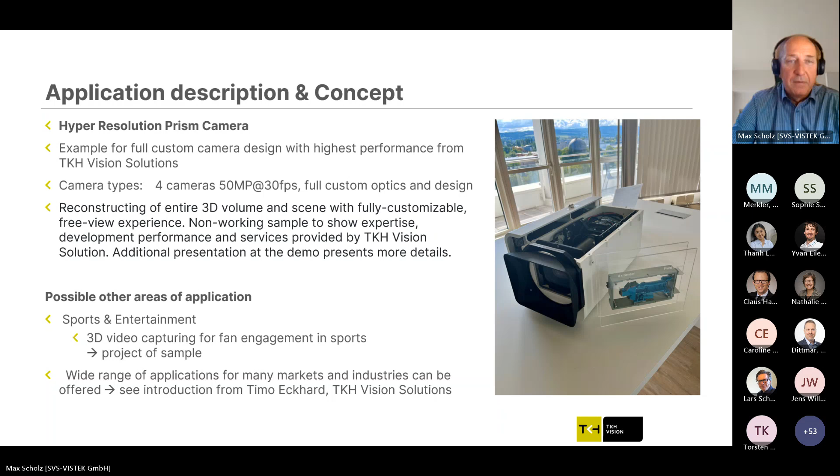The TKH Vision solutions manage all issues from the idea up to the production and maintenance, and the resulting state-of-the-art design is an impressive example for this.

With the presentation at the show, please note that the camera only indicates the potential, and we want to promote TKH Vision solutions.

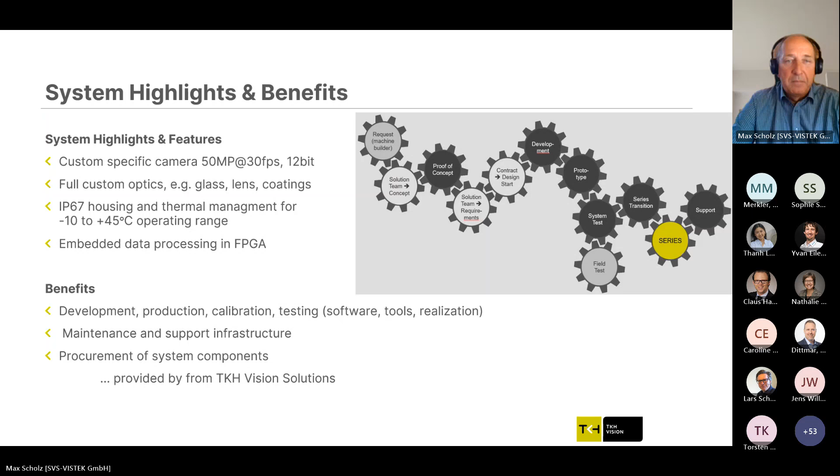Thank you, Max, for your presentation, and thanks to Tan, Yvonne, and Klaus. A lot of demos which are very striking, showing that our brands and products tie together and give really higher added value to applications on our customer side. So I wouldn't have bet on this, but we made it before time, which maybe saves us a little bit more from our lunch break.

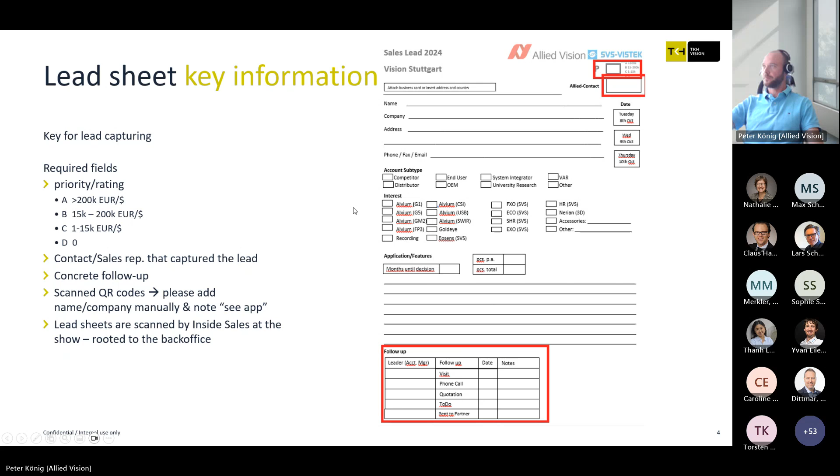Any questions? Please speak up.

There's a question I just wrote already in the chat. So my question is, I've not seen this lead sheet before. So if you have a new lead sheet, either you have to organize this yourself to have it printed, and also don't forget to put it into Salesforce.

Maybe Ralph has to adjust the old sheet. All done, all good. Also, that you have printed ones at the show? This is organized by, should be finalized by tomorrow, and then we will get in touch, Leslie.

I need some time to prepare this. Sure, I know. So true, the deadline is tomorrow, so we still need the lead sheets or the feedback from ChromaSense and NET. Those lead sheets we still need with the product interest section.

Check the chat. Peter? Yes. If it's possible, I would like to have open camera concept as a field.

Yeah, please. You should have the template. This was supplied by Johannes. So any adjustments you can do, and then we will implement this in the lead sheet. But should be done by tomorrow, as Leslie mentioned. We need to print the lead sheet. I talked to my colleagues. Thank you. Sure.